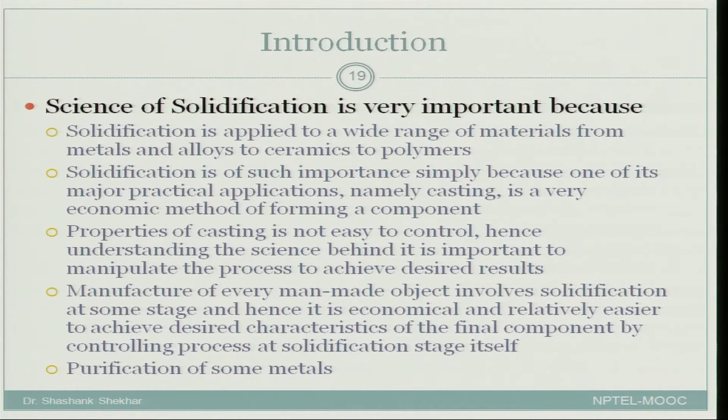The science of solidification is also important because it has allowed us to purify some metals. We will look at some examples where purification, a process called zone refining, is possible because we understand the fundamentals properly.

Let us look at some of the important processes which involve solidification. Casting is one of the big classes. You can have ingot casting, meaning large chunks of metal being formed, or die casting, where you have a mold with the desired shape, or investment casting, also called lost wax casting, and then continuous casting. We will look at one slide for each of these.

Another important place where solidification is used is joining. One example was welding, which involves melting of the base metal as well as the filler metal. Other joining processes which do not involve melting of the base metal, only of the filler metal, are soldering and brazing. Soldering, you would know, is used in electronic components. Brazing you would see in small components, for joining metals which do not have very high melting points.

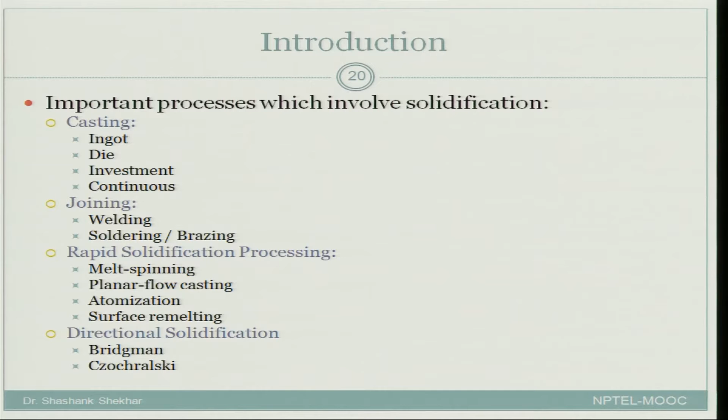Other than that, there are some exotic processes, for example melt spinning, planar flow casting, atomization, which is used for making powder particles for powder processing, and surface remelting to get special properties at the surface. Then you have directional solidification, which we use in turbine blades to make single crystals, or for making large chunks of single crystal silicon, which can then be cut into thin wafers used by the electronics industry for making smartphones, laptops or televisions.

So let us come back to some of the pictures that we saw earlier. In order to appreciate solidification, let us look at two processes, casting and welding. I said earlier that casting is used in decorative form, in art form, as well as in utility form.

And again I have shown you some of the pictures over here. The two top ones are the Dhokra art forms, which is from the Indian culture. Actually you would be glad to know that in India we had this technology or this knowledge 4000 years back, and people were using this Dhokra art form, which is nothing but lost wax form, for making sculptures like this.

And even today, I showed you the example of Moradabad, where the sculptures are formed. Moradabad is also called the Pital Nagari, or the land of brass, because a lot of brass sculptures were made there. Now, because of the rising cost of brass, people have slowly and steadily been changing to aluminum alloys, and that has again been possible only because you understand fluidity.

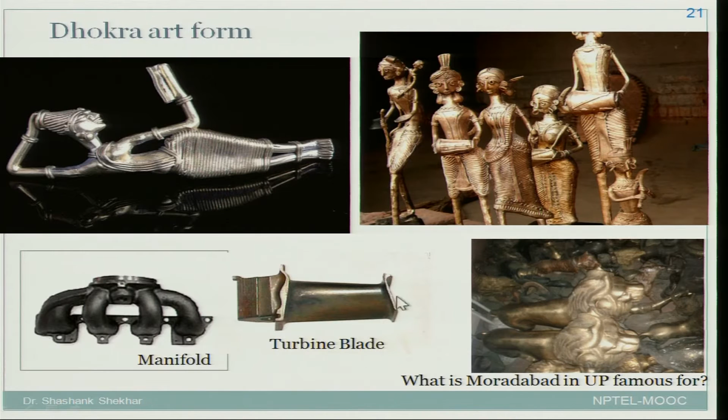Now let us look at the definition of casting. Casting is a process in which molten metal flows by gravity or other force into the mold, where it solidifies in the shape of the mold cavity. You will have a mold cavity, and you pour in the liquid metal and it freezes there. So there are basically 3 steps involved: melt the metal, pour it into a mold, allow it to freeze, and then you get the final component or decorative form, whatever you were planning to get.

Now this casting, like I said, is one of the most widely used techniques which comes under solidification. So there must be some large scale advantages of it, and it can create complex part geometries. In solidification you can get very complex 3D shapes. You can create both internal and external shapes. For example, I was talking about undercut shapes. Those undercut shapes are also possible by using casting, and both solid as well as large hollow shapes.

You can get a near net shape process for small to large components for both ferrous and non-ferrous materials. So it is not that casting is only limited to ferrous metals, which is actually a very big class of metals. You can also use non-ferrous metals, and we have already seen the examples, the brass and the aluminum alloys.

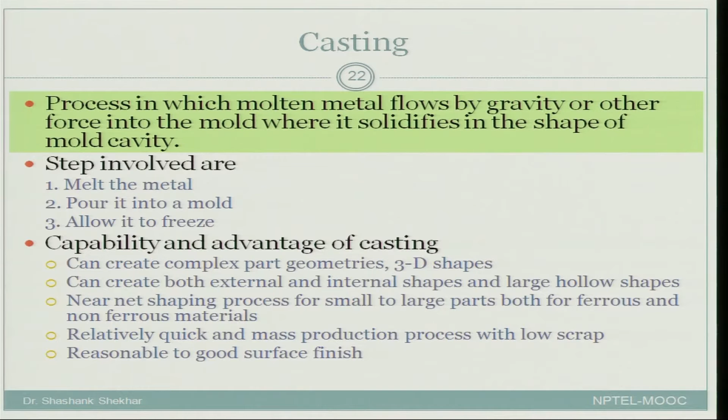Another thing is that it is relatively quick, and mass production can be done with very low scrap, because whatever scrap is there, you can put it back into the melt and reutilize it. And all you need is basically, let us say, a wooden pattern. If you have a wooden pattern, as I will show you in the next slide, you can make the mold around it, and in that mold you can get the desired shape. So all you need to do is make a wooden pattern for whatever shape you desired to make. So it is relatively quick.

And depending on what technique you are using, you can get very good surface finish. Let me caution you here, when I say good surface finish, it is not always that in casting you can get a good surface finish. It will depend on what particular casting process you are using.

Now there are also some disadvantages of casting. One of them is that mechanical strength is poor. Why is the mechanical strength poor? Because the microstructures that form are very inhomogeneous. Near the surface, like even in the first example that I showed you, you get a chilled zone, and inside you get some columnar zones, and therefore the microstructure is not so homogeneous, and so you get not so good strength. And like I said, surface finish is also a disadvantage, because in most of the basic casting techniques like sand mold casting, you will require some amount of surface finishing to be able to use it as a component.

So casting is again a very large class of manufacturing technique. What are the specific casting techniques? Sand casting is one of the most commonly used. In fact, the engine blocks in automobiles are made by sand casting. So sand casting composes 60% of all the casting that is done. Then there are some other techniques like investment casting, die casting, permanent mold casting, centrifugal casting, and shell mold casting.

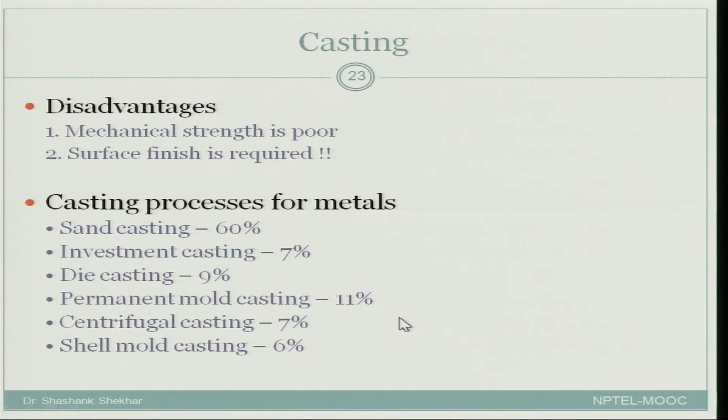So those were the different specific examples of casting, but we can also classify casting on a different basis, on what kind of mold and pattern you are using. So in that way we have 3 different classes of casting. One is expendable mold permanent pattern casting. Here the pattern is permanent, that is, it is not being made again and again; you just use the same pattern and keep using it again and again. But the mold part, which is the surrounding part, that is expendable.

The most common example is sand casting. You take a wooden pattern, make the sand mold around it, and then pour the liquid metal inside it, then break it, and you have a component. Then again you use the same wooden pattern, put the sand mold around it, and you have another component, and so on. The advantage is that you can get very complex shapes using this technique, and the disadvantage is that the production rate is limited because you have to make the mold again and again.

Another class of casting is expendable mold, expendable pattern. So here not only the mold but also the pattern is expendable. In the previous example you saw the mold was being broken, but here even the pattern is being broken. And one of the most common examples is investment casting.

So you take a pattern, for example made from wax, then you coat it with a slurry or a ceramic which is very hard, and then you melt the wax out of it so that the pattern is gone, and then you pour the metal inside it. Now the metal has taken the cavity shape, but then you break the ceramic mold that was around it, so the mold is also gone and the pattern is also gone. So this is an expendable mold, expendable pattern process.

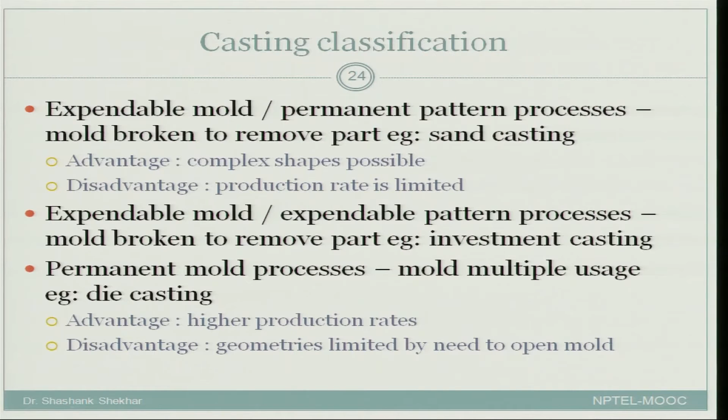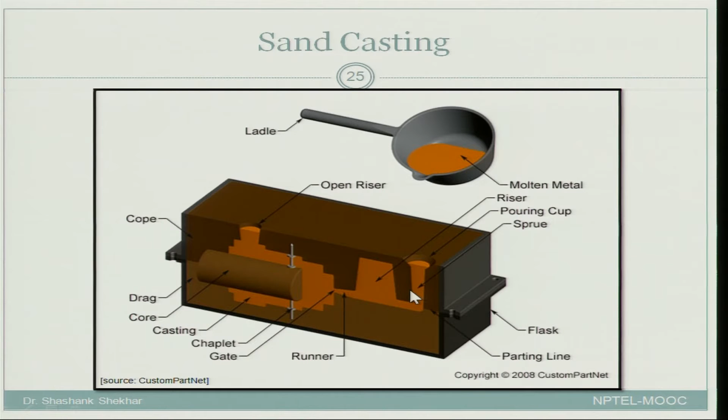Now if you understand the science of casting, you would be able to understand why there is a taper in this sprue. It cannot be a parallel cylinder. There is a taper here and there is a reason for it. We will look at that later on.

Now sand casting, like I said, is a very commonly used method, so there must be some advantages to it. Let us quickly take a look. It is relatively cheap, and it is sufficiently refractory even for steel foundry use. Since sand has such a high melting point, you can use it as a refractory even for melting of steel. So even a very high melting material like steel can be easily melted and given shapes using sand casting.

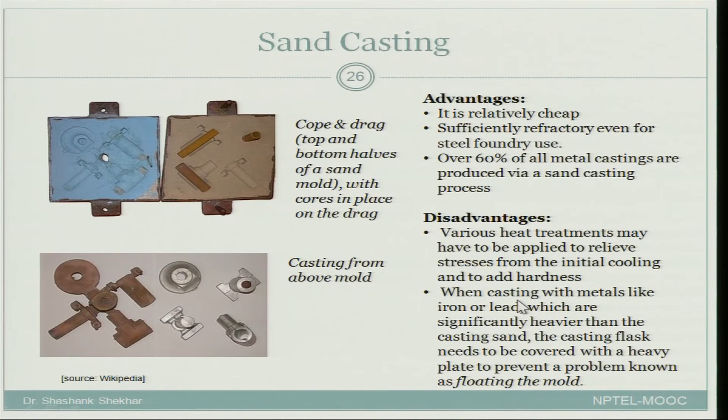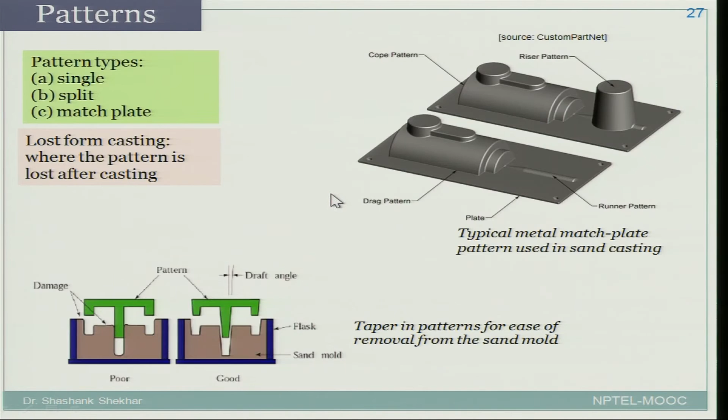Then there are also cores in sand mold, and again let me bring back the picture that we showed you earlier. So there is a core over here because you wanted a hollow region. So the purpose of the core is to allow formation of hollow regions inside your surface. Now again like I said, this is also formed of sand, but it has certain different properties from the sand that you are using for the mold purpose. What is different? It must possess strength. You see this is held over here, but it is still not breaking. So this must be very high strength.

How do you obtain this strength? You make this desired hollow core shape, and then put it in the furnace to make it hard. Then it must have permeability. Now when the liquid metal flows into it, a lot of gases would evolve. Those gases may also get into this core region. The core region must have permeability to allow those gases to escape through it. If not, then again the core may break.

Another is thermal stability, because we are talking about liquid metal temperature which is of the order of 1200 or 1500. So the core must be able to retain strength even at those temperatures. So thermal stability must be there.

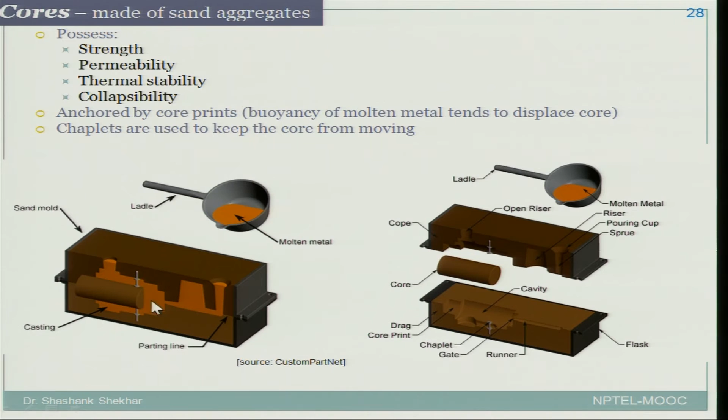And finally collapsibility. It may look like collapsibility is the inverse of strength, but it is not really. You need collapsibility because at the end, when you have made the component using casting, you want to break the sand and reuse it. So it should also have collapsibility along with the strength. These cores, like I said, can be anchored by core prints or chaplets to ensure that the buoyancy of the liquid does not displace it from its place.

Now in sand mold casting, we should also understand that the sand is not just any sand. The sand that is used has to have certain characteristics. For example, what is most commonly used is green sand, because we are adding some moisture to a mixture of sand grains, clay and water. Each of these has some purpose. The sand grain will form the basic building block, while clay and water, or the moisture, will form the glue. So it holds the particles together.

Other kinds of sands use different kinds of binders. In the green sand that I talked about, water and clay together form the binder. So this is the most general one. Other binders that you may have in different kinds of sand include organic resin or inorganic binders, for example sodium silicate and phosphate. So based on it we can have different kinds of sand mold. Green sand mold is the one which has moisture, so it is called green sand mold.

Then there is dry sand mold, where, since you do not have moisture, you add something else, for example organic binders rather than clay and water. Then there are skin dried molds, where the mold cavity surface of the green sand mold is heated to form a strong layer up to a thickness of 10 to 25 millimeters.

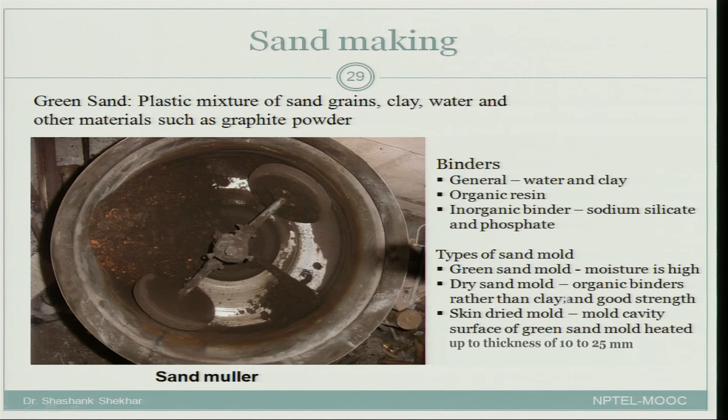The advantage is that you do not have to design your pattern, and there will be no parting lines. Most of the time a pattern will be of two different parts, so there will be a parting line, and you will have to design the patterns to ensure that the parting line is minimum and not obstructing taking it out. Those kinds of things you do not have to consider here.

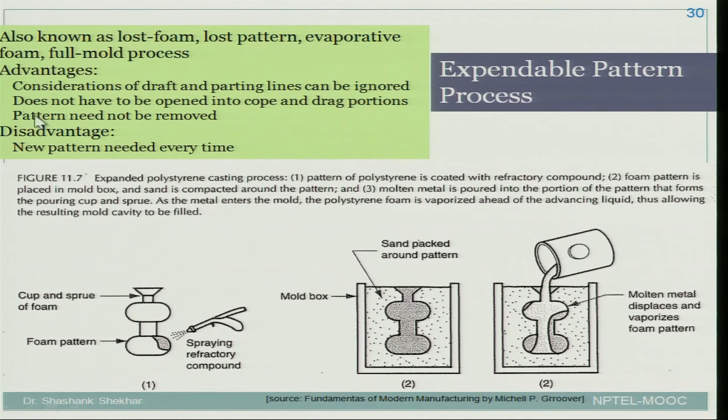The pattern need not be removed, so there will not be any breakage while removing the pattern, but the disadvantage is that every time you will need a new pattern. Another example of casting we described earlier was permanent mold casting. So we had expendable mold casting with permanent pattern, expendable mold with expendable pattern, and then permanent mold casting. This is the third class of casting we talked about.

You get fine grains because the heat conductivity is very high, so you get a very fast cooling rate giving very good strength, and you also get very good dimensional control. The disadvantage is that you can only have a single geometry. This die cannot be used for any other purpose; you cannot make any other shape. And this is used only for low melting metal alloys.

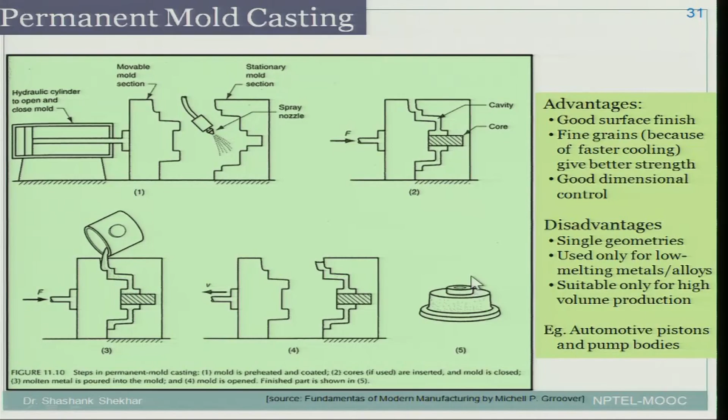So we will end here, and next time we will look at some more casting techniques along with the welding that we talked about, and also give you a layout of what we are going to cover for solidification. Thank you.